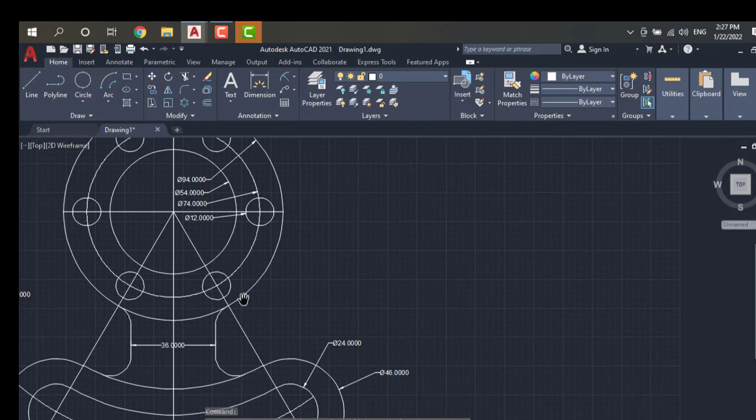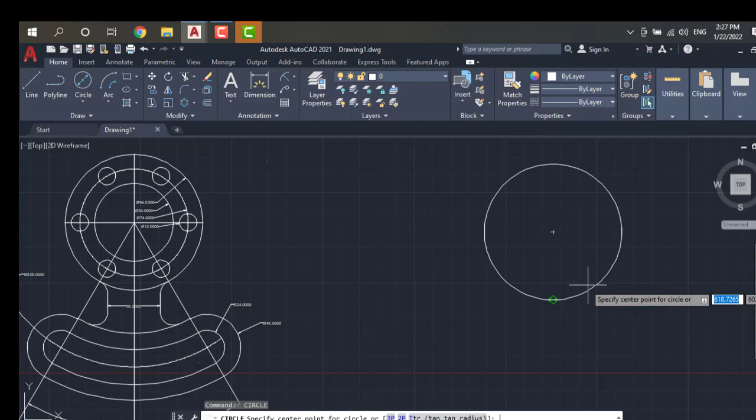Initially we have to take these three circles. Just go to circle. Here we have to take the diametric circle, center diameter circle. First of all, we have to take the 94 dia circle. Again we have to click the space button, the previous command gets activated. Here I have to take the 74 dia circle. Next again space bar. Then the 54 dia circle.

Next we have to take the middle lines. So take a line here. This is our midpoint, then draw a middle line. Okay, click on escape and again space bar. Here is another middle line for us. This will be extended like this.

Okay, click on escape. Next we have to take a circle of dia 12 at this midpoint. How much dia is it? 12. Okay, so based on this midpoint, the circle will be drawn.

Next we have to do the polar array. Here we have the rectangular array, path array, and polar array. From that, go to polar array, just select the object and click on enter. Give the center point. Here we have to change the number of items also. Then I want 6 holes. Here I got the 6. Okay.

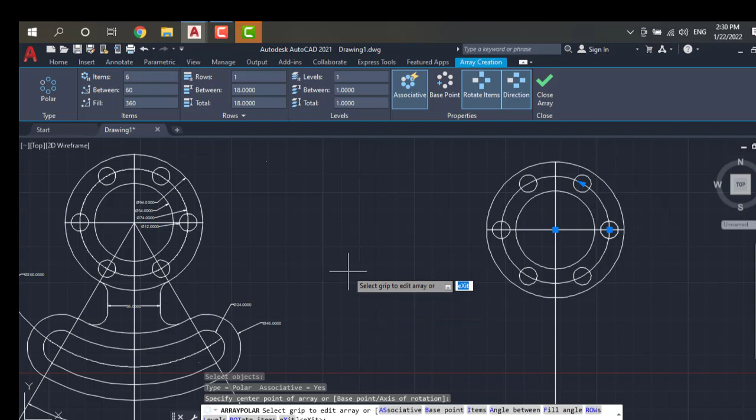Click on exit. Okay, next we have to take these angle lines. For that, take a line. This is the effect of... this is 30 degrees right, 30 degrees left. So I have to take this as 120 degrees.

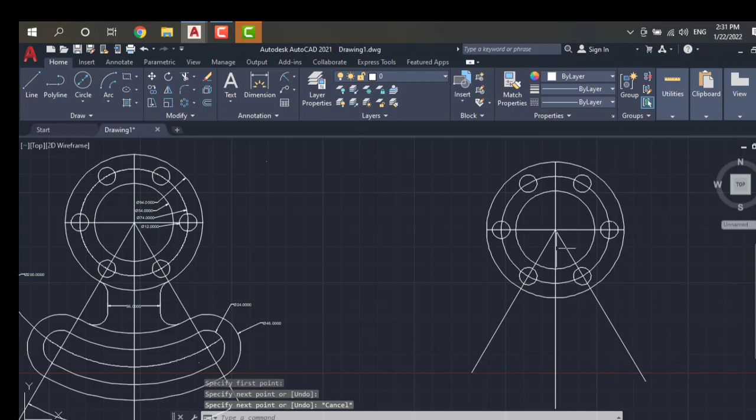Escape. Just again take space bar. Here you have to take 60. Click on escape. One minute, and this is some change.

Okay, here I have to take the angle of 60. Then, okay, next.

After drawing these lines, we have the middle curve as dia 200 here. See, this is a dia of 200.

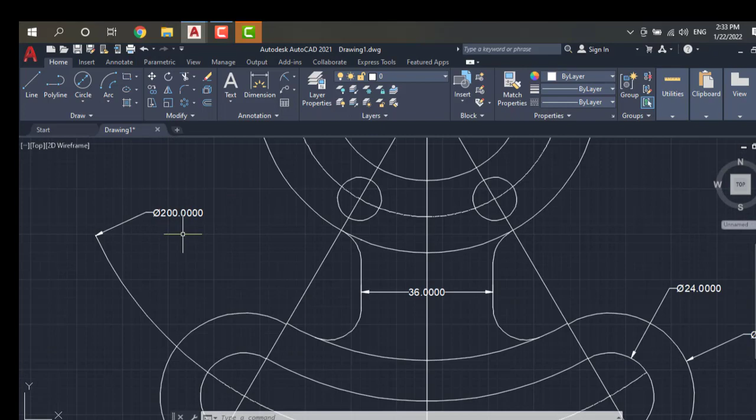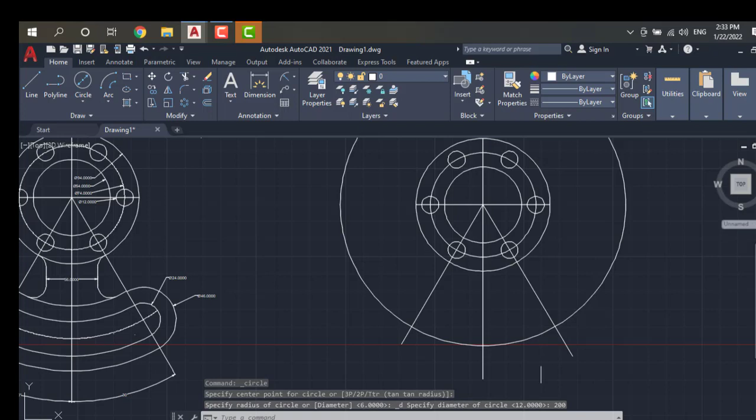So, take a dia of circle. Based upon this midpoint, I have to mention the 200 dia. Yes, from this circle, I have to take another.

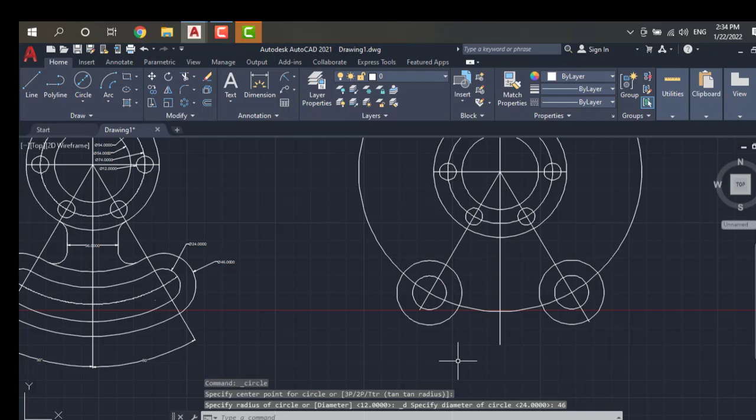This is the dia of inner circle, dia of 24, outer circle dia of 46. Okay, then I have to take from this, 24 first, enter, and then again space bar, or take a dia of circle. This is 46, enter, again take a circle. This is 24, enter, and again you have to take how much. This is 46, enter. By using the circles, you have to draw

a circle based upon this center point. Just touch on these points. Okay, just click again, space bar. Here you have to draw like this. You have to touch this point. Okay, yes, again space bar, then drag it and click on this point. Again space bar, you have to drag this, and we want this point like this. We have to touch these circles, inner and outer.

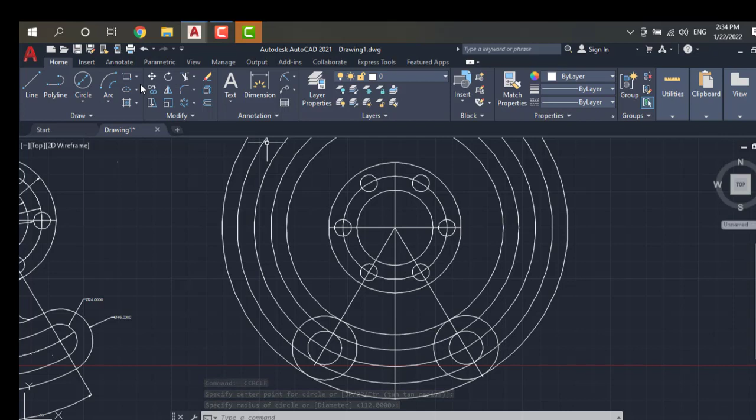So we have to trim these extra lines. Okay, then here also you have to trim.

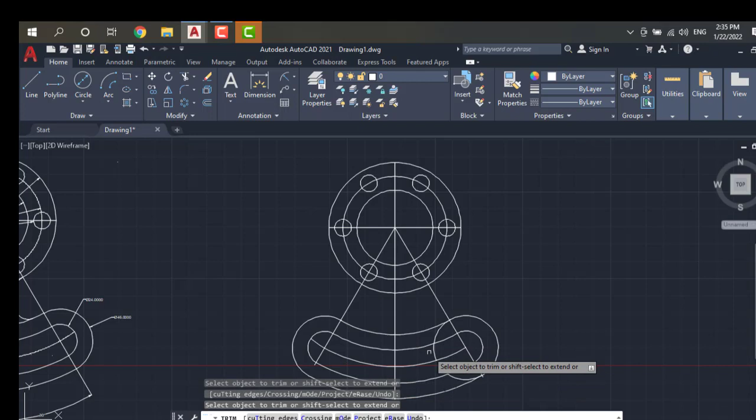Yes, see it will be finished. Then here is a small one, we have to left it. So here the distance is 36, that means from here to here 18, from here to here 18. Right force is 18, left force is 18. From here just take 18. Enter.

Just click on escape. Again you have to take the line here to here. This is also 18. Enter. From here to here you have to touch this circle.

Here we have the option of extend, so we have to extend this like this. Just escape it. Next you have to go to the fillet option.

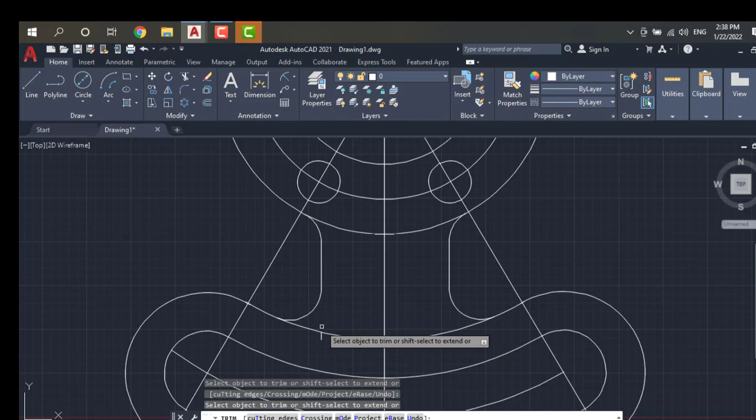Yes, so our picture will be completed. So here our diagram will be completed. See, the 3 circles came, next holes, 6 holes, next all the diagram will be completed.

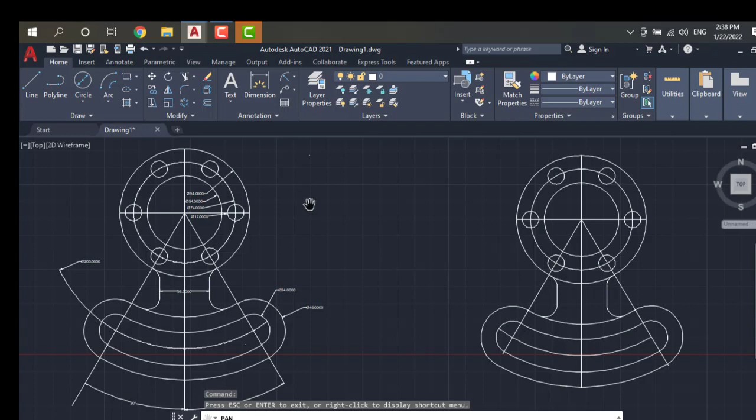Then how to give dimensions for this? Then we have to go to the dimensions. Here there is an annotate option. Here we have the options of dimensions. Just you click the dimensions here, arrow mark. There is an angle, radius, diameter. I want radius or diameter. Here we have the option.

How much is it, 54. Again just click on. It will be 74. Again spacebar. It will be 94. Okay.

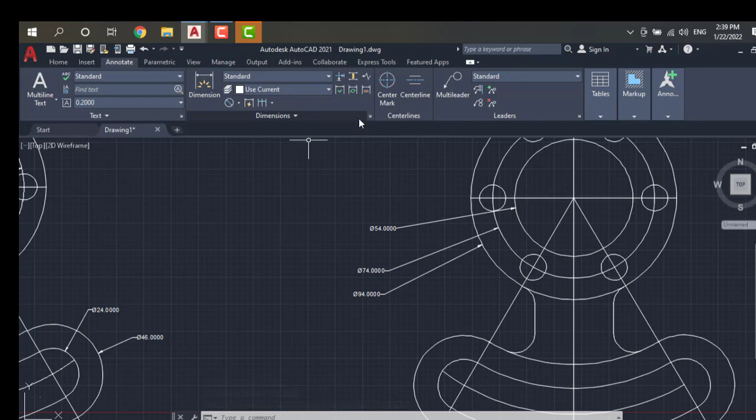I want to increase these values, so go to this modify option. Here we have the text, increase text height as 3. Okay. Just click on OK.

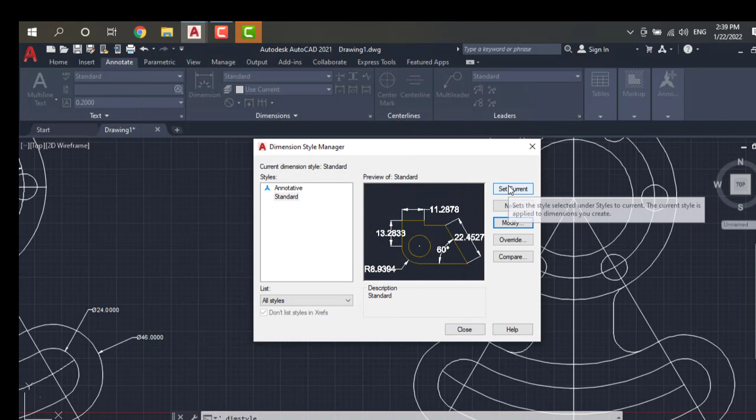Again go to modify, go to symbols. We have to change this also to 3. Just click on OK. Set current will be used. After that close it. Yes, our dimensions will be increased.

Then again go to dia of this circle, like this. Again you click mark, spacebar. This one dia is 18 and this one radius is 18.

Again spacebar. This one is 74, sorry, 24. And this one is 46. Again click on this. This one there is 200.

So like this we have to put the dimensions. Along with this we have to give the linear dimensions also. Here linear dimension of this bar is 36. Next you have to give the angle.

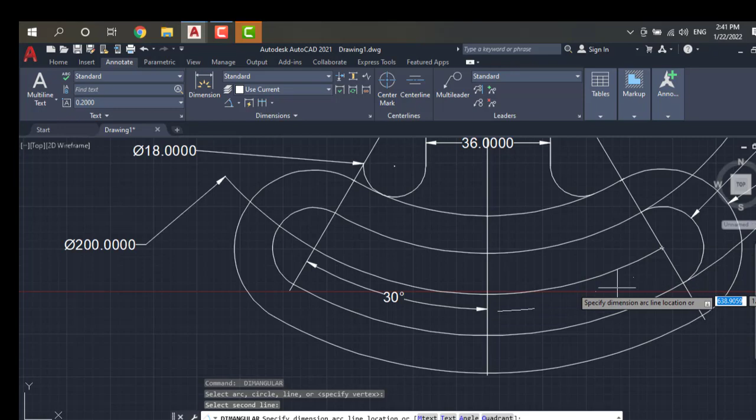From here to here you have to mention the angle. Again spacebar, you have to give the angle between these two. This is also 30 degrees. Okay.

So here number of holes will be 6. We have to give these dimensions by using multi-leader. Here you have to write the 6 number of holes, like this. Okay.

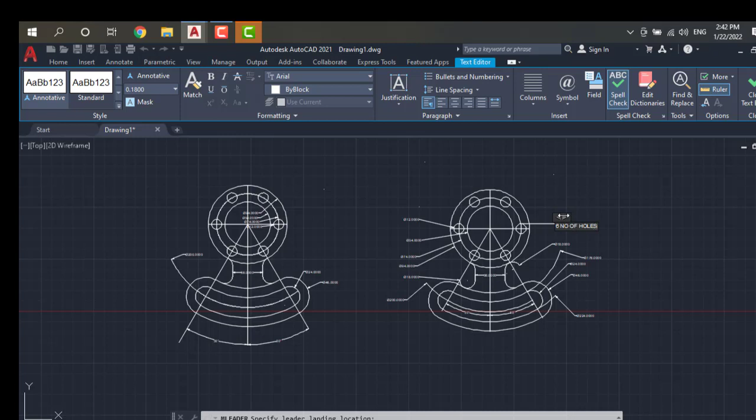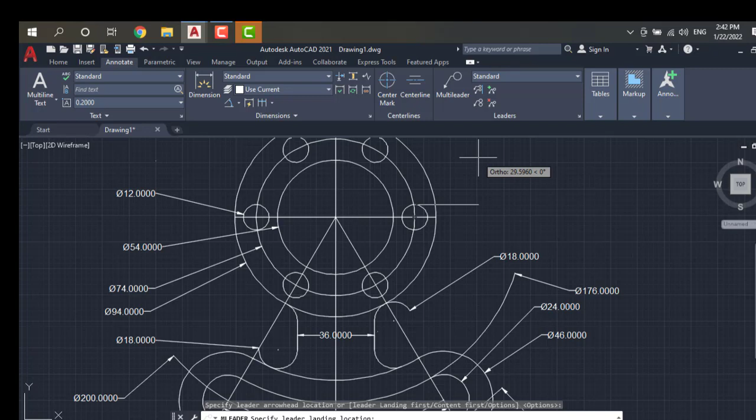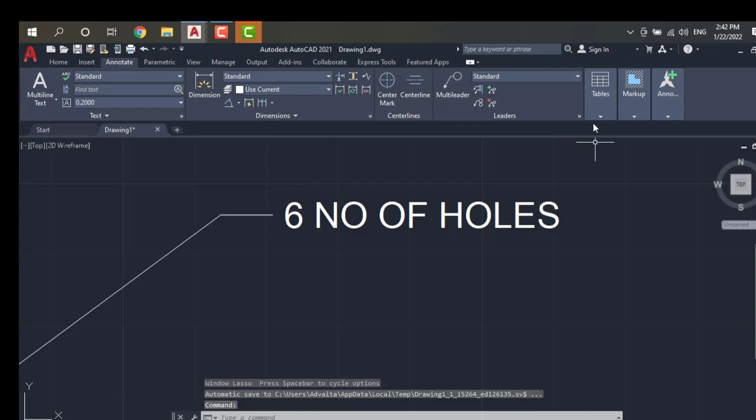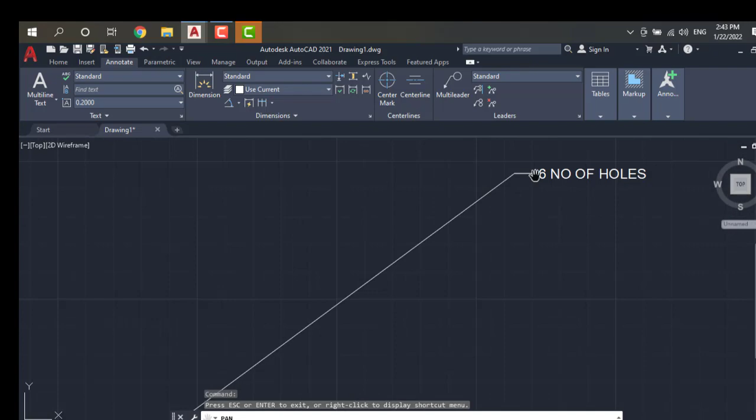Yes. Here this also you have to change here. Go to modify, you have to view the size as 3. Click on OK, set current. Close. Yes. Our 6 number of holes will be given. Then our diagram will be completed here.

So all dimensions will be given, the picture will be completed. Okay, thank you.